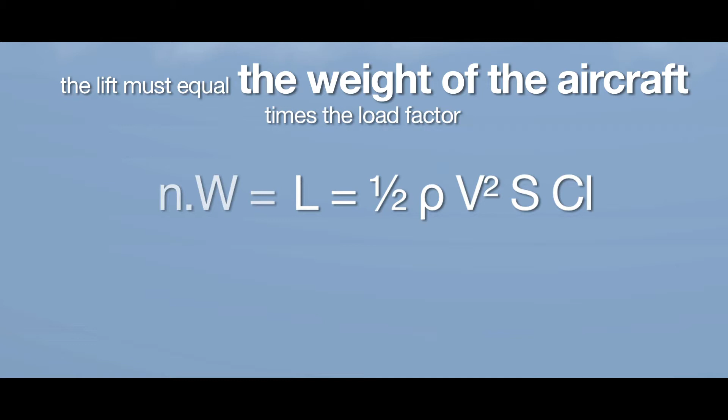The CL of the wing increases with the angle of attack up to a maximum, CL max. Any further increase of angle of attack above this angle of attack of CL max will make it impossible for the airflow to smoothly follow the upper wing surface. The flow will separate from the surface, causing the CL to decrease and drag to increase.

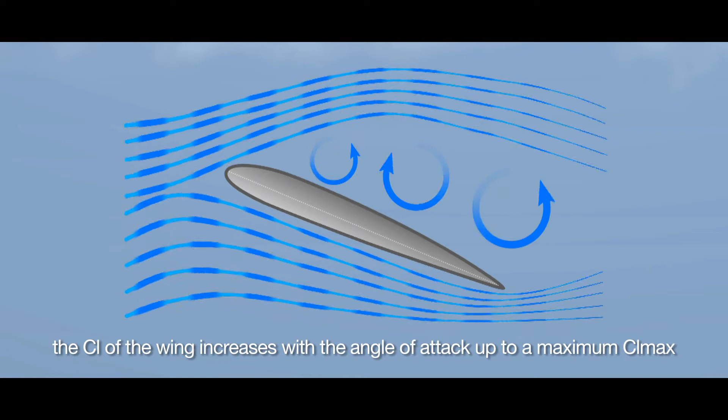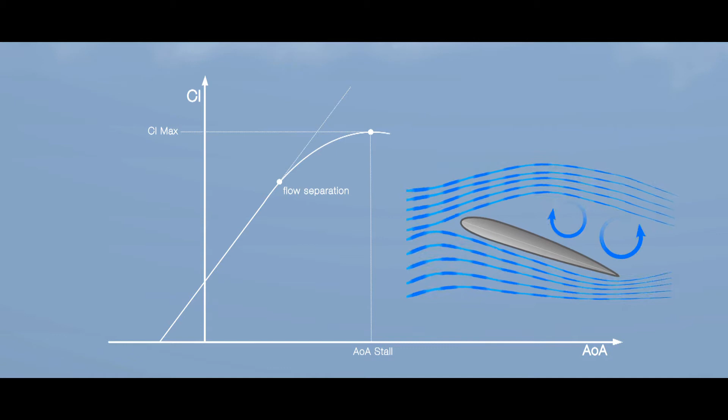On this graph, we can clearly see that the angle of attack increases from zero lift value. The curve is linear over a big range. When the flow separation begins, the slope of the curve begins to fall off. The lift reaches a maximum and begins to decrease. The angle of attack at which it starts to decrease is the stalling angle of attack or critical angle of attack. This corresponds to the value of CL max. One can clearly notice that to recover from a stall or to prevent a stall, the angle of attack must be decreased to below this CL max value.

The aircraft is considered stalled when the behavior of the aircraft gives the pilot a clear and distinctive indication that the aircraft is stalled. Indications of a stall, occurring either individually or in a combination, are a nose-down pitch that cannot be readily arrested, buffeting of a magnitude and severity that it becomes a strong and effective deterrent to further speed reduction. The pitch control reaches the aft stop, and it is impossible to stop the aircraft from descending.

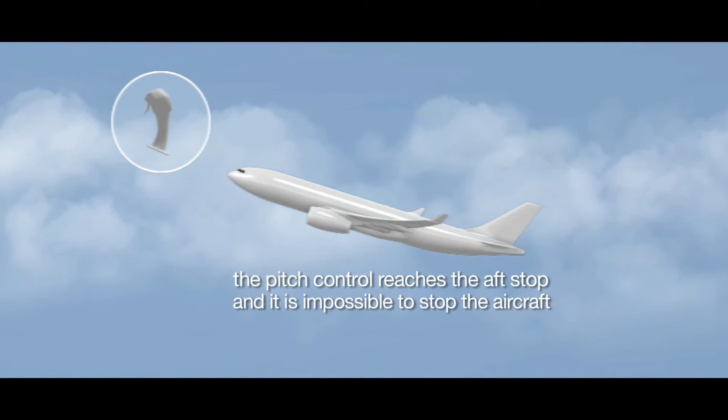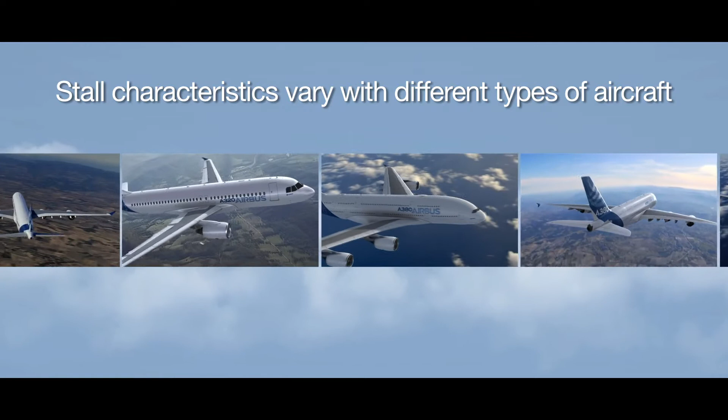Stall characteristics vary with different types of aircraft. However, for modern aircraft during most normal maneuvers, the onset of the stall is gradual. The first indications of an approaching stall may be provided by any or all of the following: unresponsive flight controls, a stall warning or stall prevention device, significant uncommanded roll at the stall, or aerodynamic buffeting. The transition from approaching stall to stall is sometimes difficult to identify precisely. Therefore, the two phases should be treated as the same from a recovery point of view.

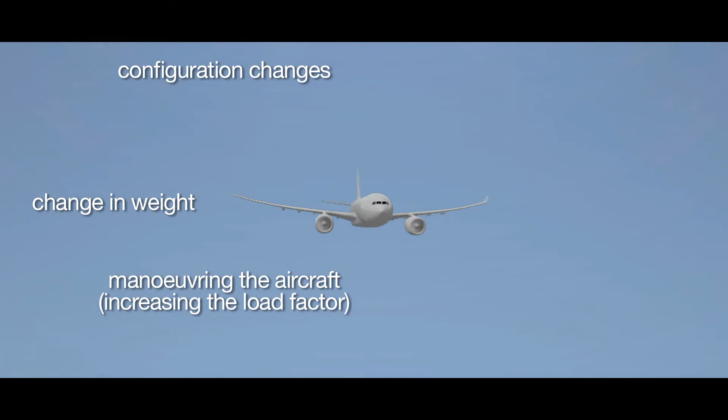Factors that affect the stall speed are change in weight, maneuvering the aircraft increasing the load factor, and configuration changes. This is how the CL versus angle of attack changes with slats extension, flaps extension, speed brakes extension, and finally wing contamination.

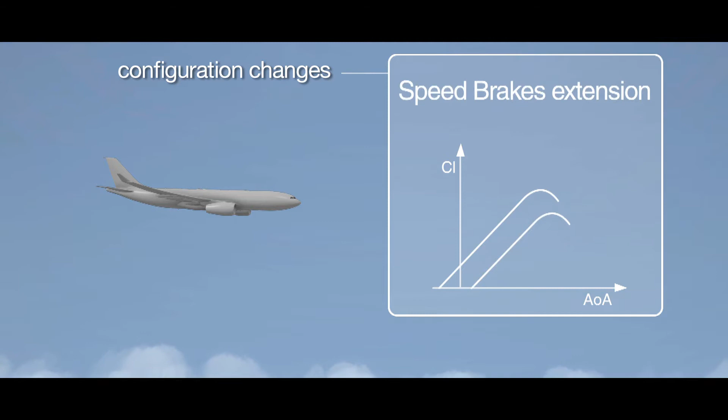Let's see how the CL max varies with the Mach. Remember the general lift equation, N times W equals L equals a half rho V squared S CL. Expressed in Mach condition, it becomes N times W equals L equals 0.7 P Mach squared S CL. At a low Mach number for a given configuration, a wing stalls at a given angle of attack.

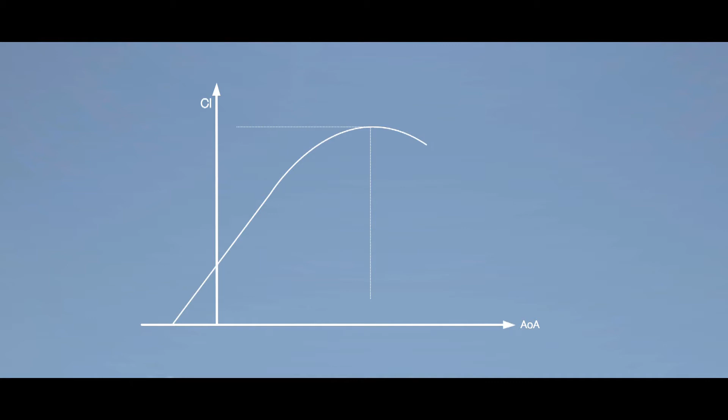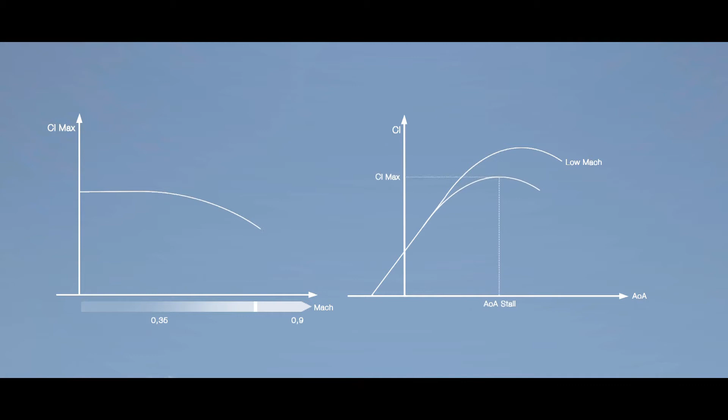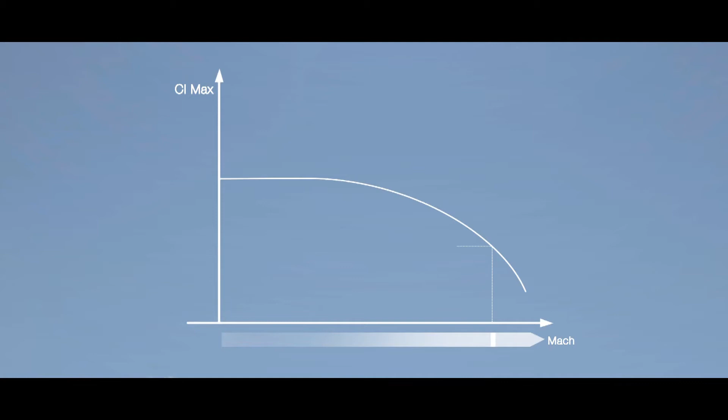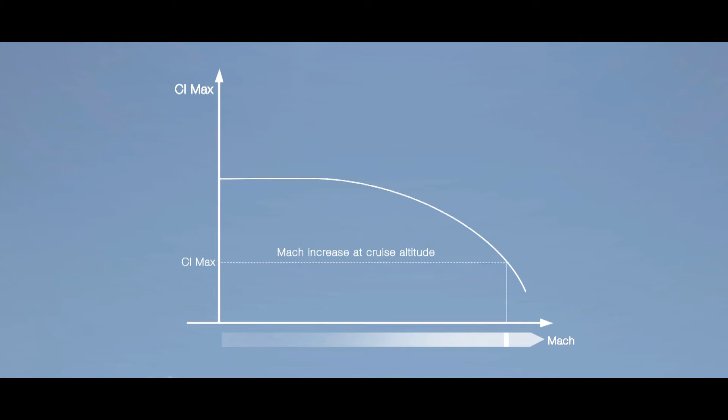Beyond a given Mach number, order of magnitude Mach 0.35, any Mach number increase has two consequences. The angle of attack at which the wing stalls decreases. The maximum lift coefficient, which is obtained at stall angle of attack, decreases as well. It means that at high altitude, where Mach effects become significant, the margin from the stall decreases. In other words, in a high-altitude cruise, when the Mach number increases, the lift capacity decreases. That is to say, the load factor capability decreases, as does the ability to maneuver.

That being said, let's now take a look at particular stall phenomena. Accelerated stall. An accelerated stall is caused by abrupt or excessive control movement. An accelerated stall can occur during a sudden change in flight path, during maneuvers such as steep turns or a rapid recovery from a dive. It is called accelerated stall because it occurs at a load factor greater than 1g.

Secondary stall. A secondary stall may be triggered while attempting to recover from a stall. This usually happens as a result of trying to hasten the stall recovery, either by not decreasing the angle of attack enough at stall recognition, stall warning, or by not allowing sufficient time for the aircraft to begin flying again before attempting to regain altitude loss.

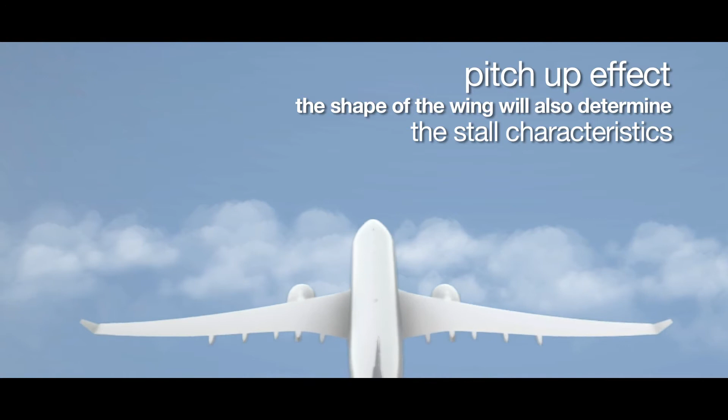Pitch-up effect. The shape of the wing will also determine the stall characteristics. Modern jet aircraft have swept-back wings. This kind of wing allows higher speed, but it has an increased tendency to stall at or near the wingtip first. The loss of lift at the wingtip moves the centre of pressure forward, thus inducing a pitch-up moment.

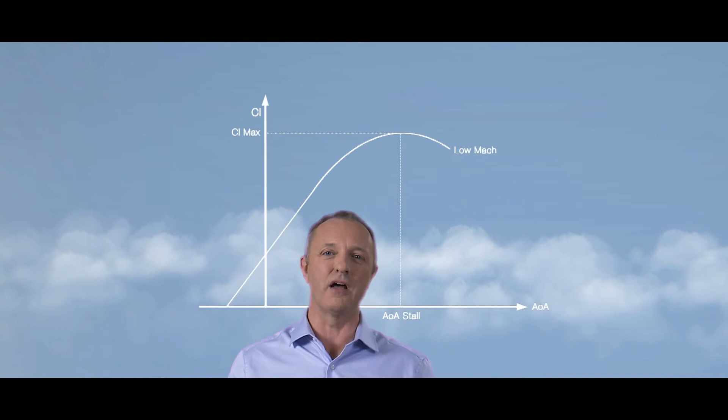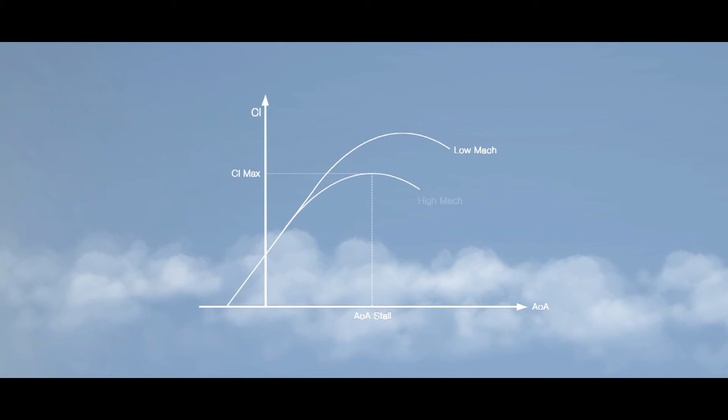So, what do we have to remember? For a given Mach number, a wing stalls at a given angle of attack. When the Mach number increases, the value of angle of attack stall decreases. When approaching the angle of attack stall, the wing generates a certain level of buffeting, which tends to increase at a high Mach number. When the angle of attack increases and approaches the angle of attack stall, in certain cases, a phenomenon of pitch-up occurs as a result of the change in lift distribution on the wing.

When the flow over the wing is stalled, the only possible means to recover a normal flow is to decrease the angle of attack to a value lower than the angle of attack stall. Stall is only an angle of attack problem. It is not directly a speed problem. Remember these last 2 points.

So, that's the theory. But how does it work in practice? For this, we've decided to use a production A330, representative of aircraft in service. Let's start with deterrent buffet. Deterrent buffet is a phenomenon which happens at a certain stage in a stall. It is so strong that it can be dissuasive. It should be noted that the definition of deterrent buffet is part of the stall definition as specified in documents certified by the civil aviation authorities.

Buffeting starts gently and gradually increases until the pilots decide to recover. Note that buffeting is hardly perceptible at all when the warning is triggered, but builds up quite quickly to a very harsh level.

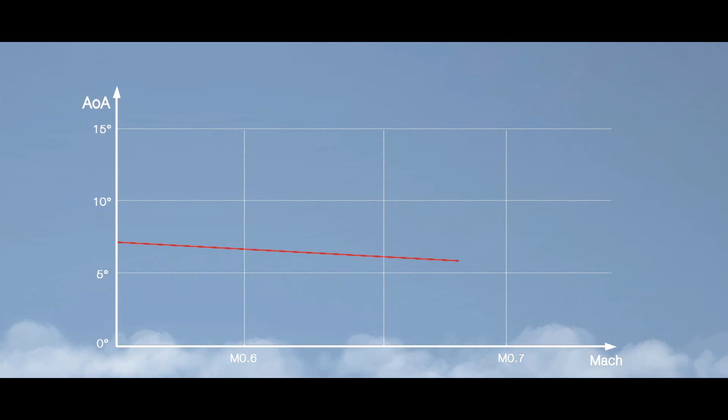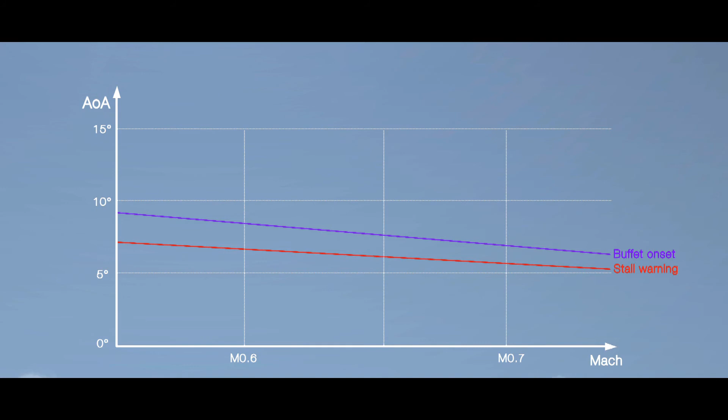Let's review this again.

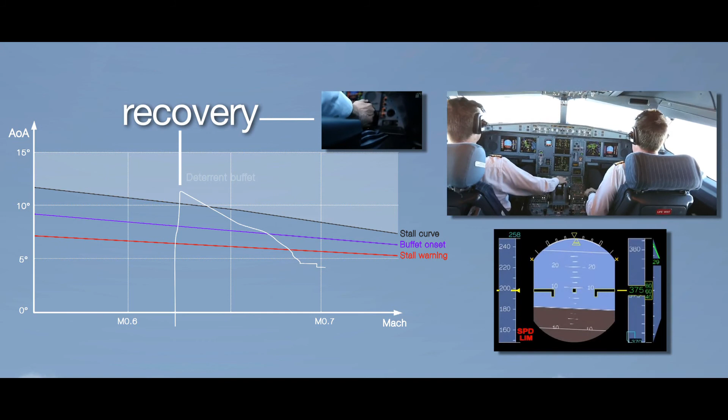In the event of a significant uncommanded roll at the stall, reduce angle of attack before recovering the bank angle.

In this film, you have seen various theoretical and practical aspects of stall situations. The most important thing to remember is that at the first indication of a stall, you must release the back pressure and, if necessary, push the stick forward to decrease the angle of attack until the stall indications are no longer present. Remember, it is always better to avoid a stall, but should you encounter one, strictly apply the recovery procedures published in your aircraft operations manual.